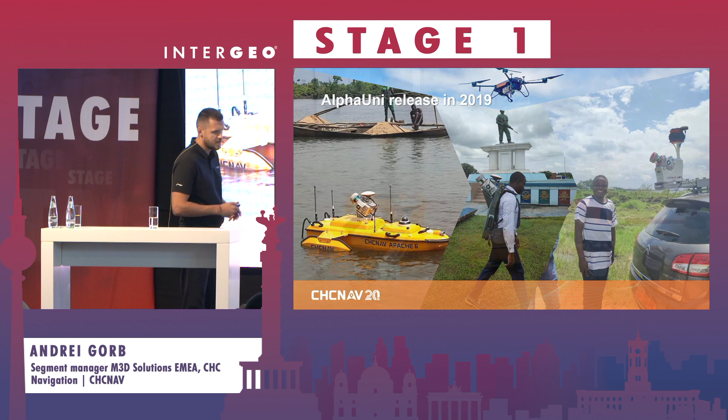And that year, the Alpha Uni series first came to the market. And you can see just one laser scanner can be attached on any vehicle, on various drones, on the backpack, and for small boats, like we have Apache, or on big vessels. So for multiple purposes. And then we continued the innovation, because we want to democratize mobile mapping technology. We make products smaller, easier to use, and more cost-effective. Then in 2021 came a new series of Alpha Uni, Alpha Air. And what is next?

As a leader in the geospatial industry, we always want to improve, we always want to be better, we want to always provide more accurate technology, longer range, more user-friendly data processing. To make this happen, first of all, we have a vision of our CEO. And he says, we are the leaders in GNSS, yes, but GNSS is not enough today to map everything on time. GNSS is a total station. LiDAR is the future. We agreed, and I hope you agree.

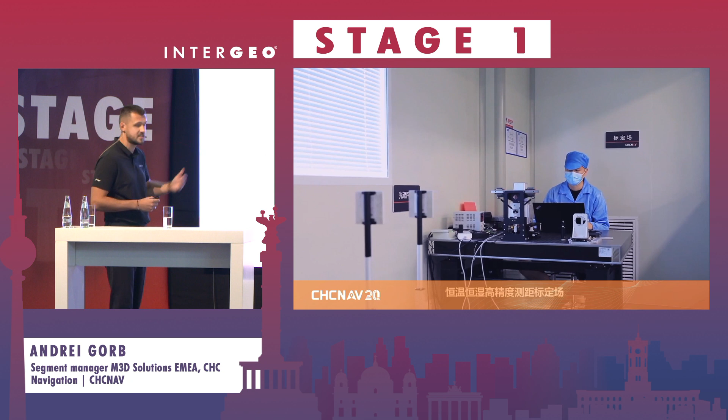And for this, first of all, to make democratization of technology, we built a fully new factory in Wuhan city. And you can see from inside how we develop our LiDARs. And we take very serious tests for accuracy, for angular measurement, stress tests, temperature calibration, because we need to be sure that LiDARs will work in the hot weather of the Middle East, of Dubai, Saudi Arabia, and they will work somewhere in the north, in Canada, in Ukraine, in Germany, or in Sweden.

So finally, after such big investment, after 4,000 tests in multiple environments, in hard environments, we're happy to introduce today at Intergeo, and you can see it on our booth, our latest generation of laser scanner, of LiDARs, fully based on CHC technology. Finally, we have Alpha Uni 20, or AU20 for short. You will see it on our booth, but in a very small form factor, in very small design, we combine long scanning range, high accuracy, very good vegetation penetration, which is needed for forestry mapping. And one of our main features is multi-platform installation. So let's see one by one.

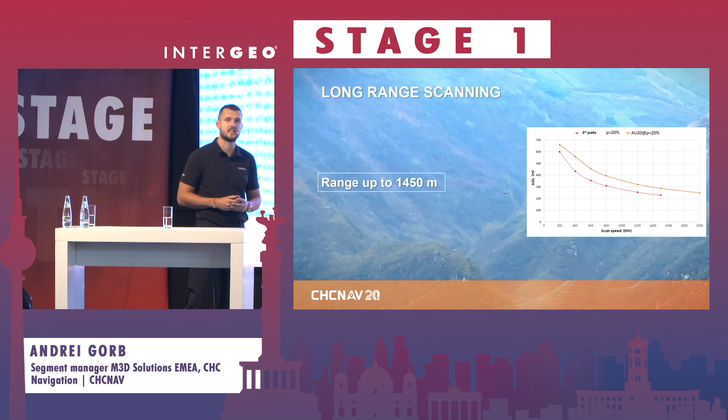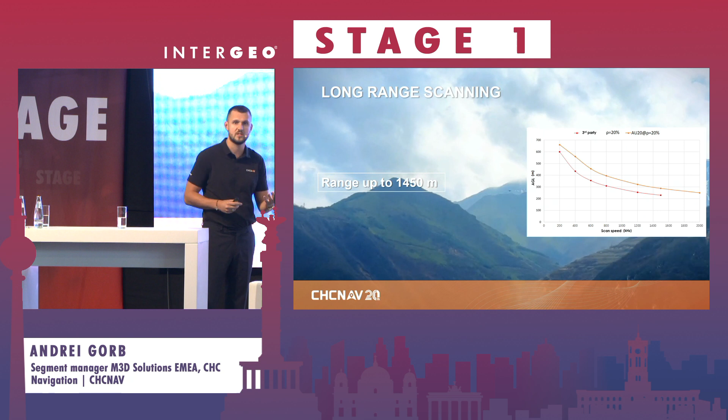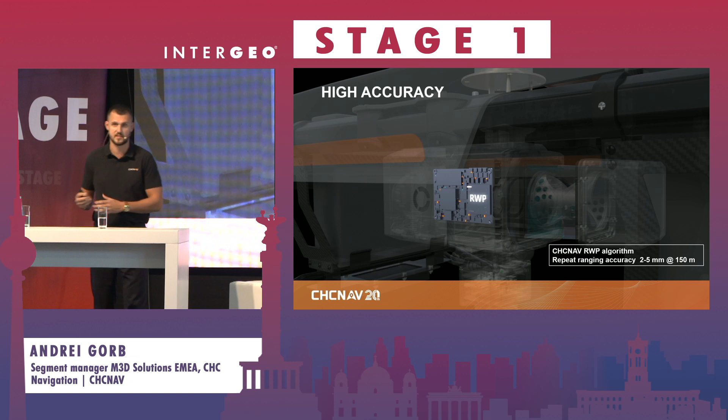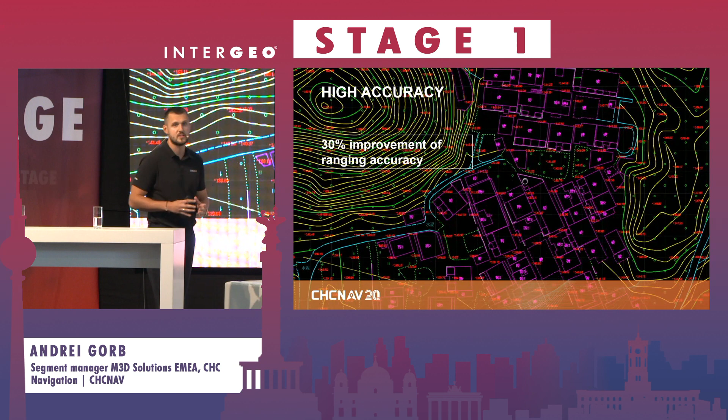For the long range, this device can scan up to 1.5 kilometers. So your drone can fly much higher, if it's allowed, can cover much bigger territory per mission, or you can use it more efficiently if you install it on a helicopter or a small plane. For the data accuracy, this device achieves 2 mm at 30 meters and 5 mm at 150 meters precision, for LiDAR accuracy itself. So we say absolute accuracy is the same as a total station or GNSS, so it's 1 or 2 centimeters. And compared to our previous generation, our accuracy improved by 30%, which is a very high achievement.

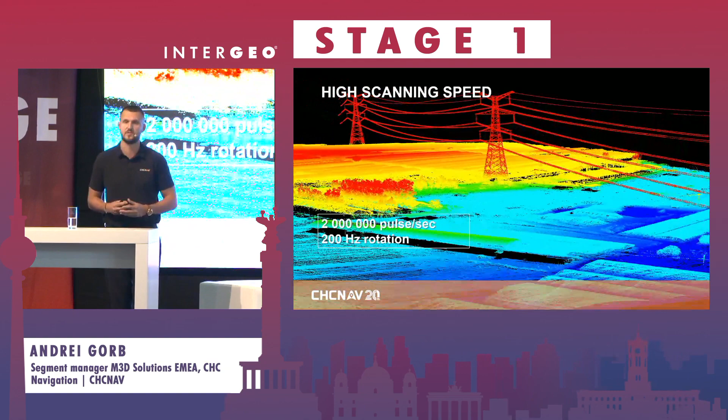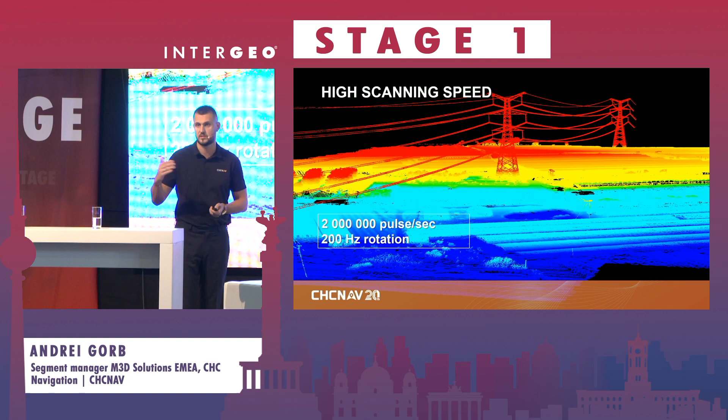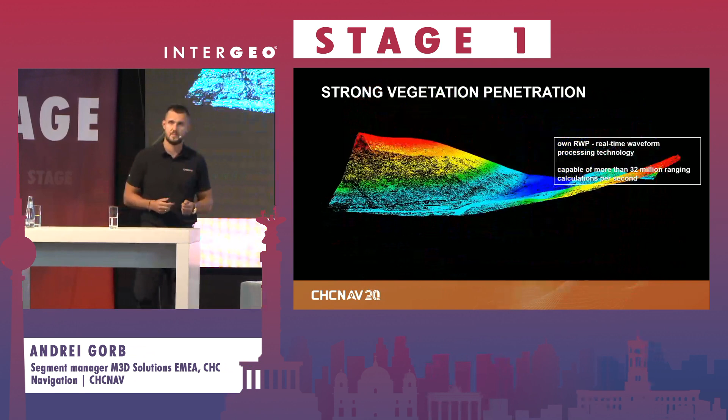For the speed, this new laser scanner generates 2 million points per second, one of the fastest machines today you can see in the market. And the rotation speed is 200 Hz. So 1,000 points per square meter you can achieve even flying on the drone at very high altitude, 120 meters. For users who are interested in forest applications to get the ground surface, this device makes 16 returns. 2 million points per second. It means 32 million ranging calculations per second.

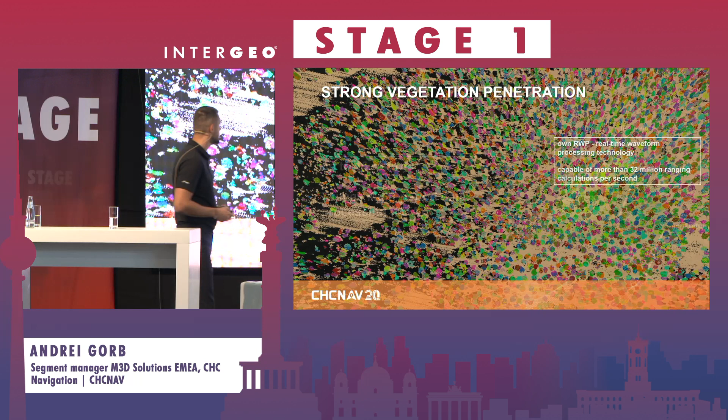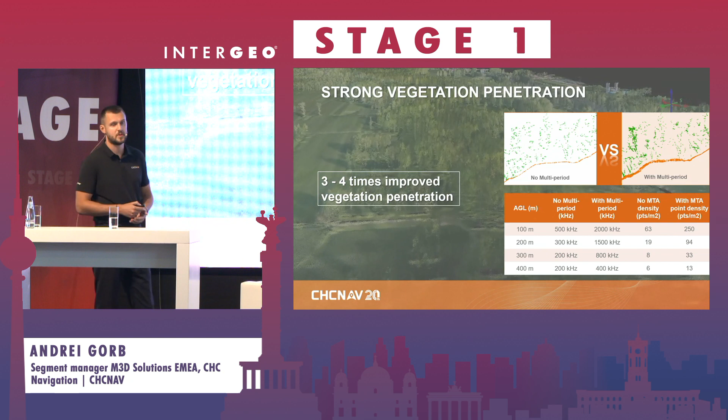And you can see on this video how good the vegetation penetration is, how good the terrain is, and you can even classify the trees for forest mapping. As you know, the more returns you have, the higher the probability to penetrate the trees and get your final terrain. Modern LiDARs usually have 3 to 5 returns, which is not enough for good quality terrain results, especially in a very dense forest. On this table, you can see how the technology worked previously on the left side of your screen. And on the right side, you can see that 3 to 4 times more dense point cloud we will get with the new technology over the trees.

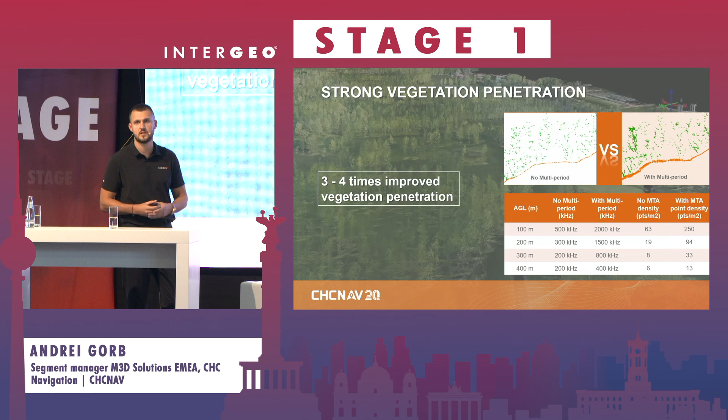And this is our main feature, why clients select CHC: multi-platform setup. You can see one device, Alpha Uni 20, you can use in various installations on many drones because it's quite lightweight, 2.8 kilograms. So it could be a CHC drone, or local UAVs very popular in Europe or in the US. We can also install it on various vehicles, car, train, move it to the backpack, and as you saw before, on the water for bathymetric survey on vessels or on the compact Apache series.

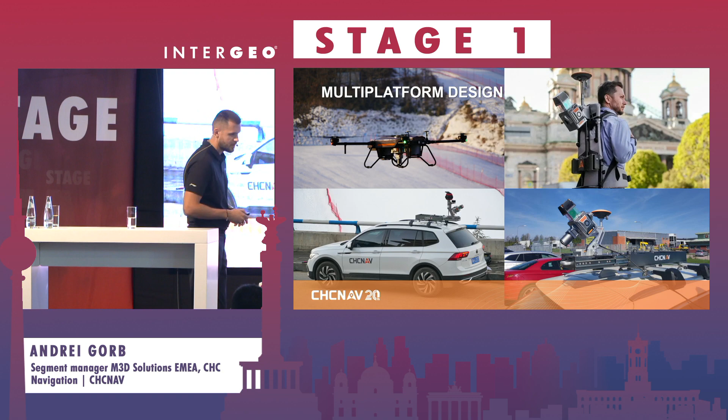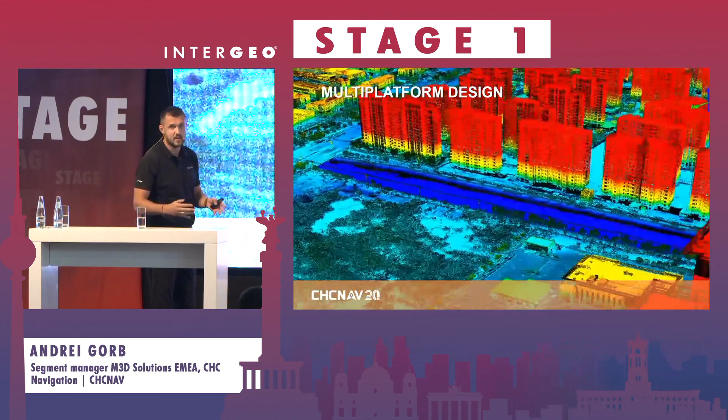The idea of multi-platform setups gives you the ability to combine the data in one view from the top perspective, from airborne survey, and from the ground survey. If you go to the mining industry, if you go for smart city mapping, for data capture in the city, then you have the ability to see everything from one survey with just one device in one processing of one

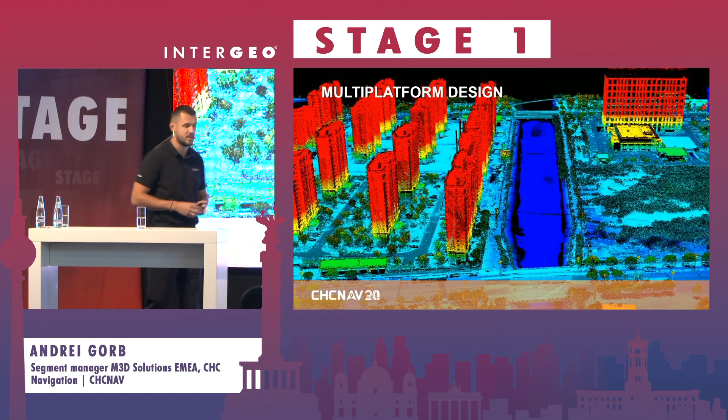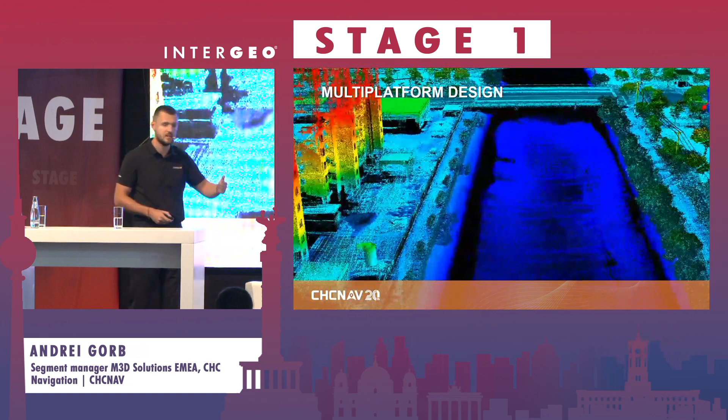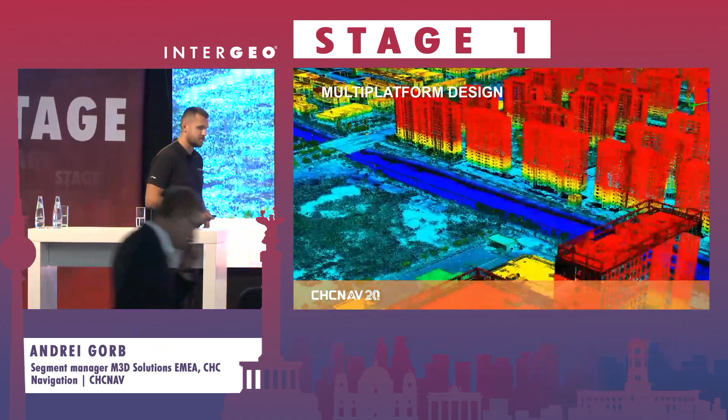software ecosystem. Like on this example, we see dense point cloud on the facades, on the road because of the car. We see even the point cloud on the water because of the multi-beam echo sounder which we use on our boat. And we see the rooftops because we use the drones here. So you don't need to use any other technology. You can just use one laser scanner in all environments.

With the release of AU20, you also can see on our booth our next generation of the car platform or backpack platform. We call it Alpha Pano. It contains quite a standard industrial camera, Ladybug 5 Plus, or you can optionally install Ladybug 6. And also in the middle, you will see this small scanner, which is needed for the SLAM.

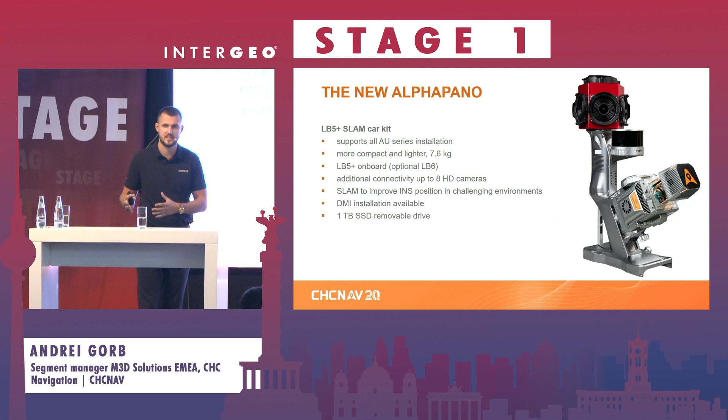So, you know, in hard environments for car mapping, in tunnels, in the city center, under the tree canopy, you have a lot of lack of GNSS signal. Your trajectory could be not calculated properly. The accuracy will be decreased. By using SLAM in this gap, you improve your final trajectory. So instead of using many GCPs or using the odometer, now this technology will make work more efficient.

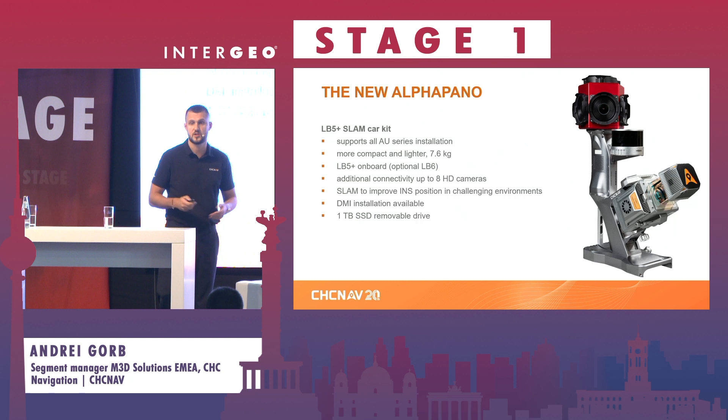And this platform is very flexible, so you can install our latest Alpha Uni 20, or you can move to our Riegl-based solution Alpha Uni 900, or to the lower cost or basic one, Alpha Uni 10. So it's a very flexible installation, very light. The total weight is 7.6 kilograms. Even a lady who is responsible for surveying can easily put it on the car.

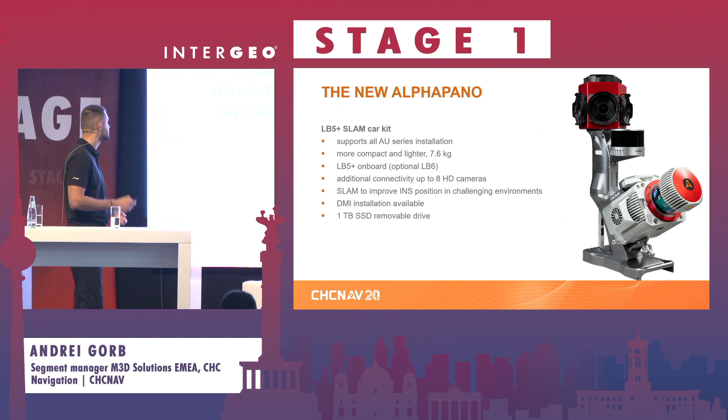And some examples of how we use this new generation from the car. It takes just several minutes to install, and then you can easily move without any cables, any special calibration to the backpack and walk, and SLAM will improve your position in hard environments. Then if you're a bit lazy and you don't like to walk, you can ride this buggy in places maybe where UAVs are prohibited to fly or a car cannot go. Like this is a very beautiful park in Saudi Arabia.

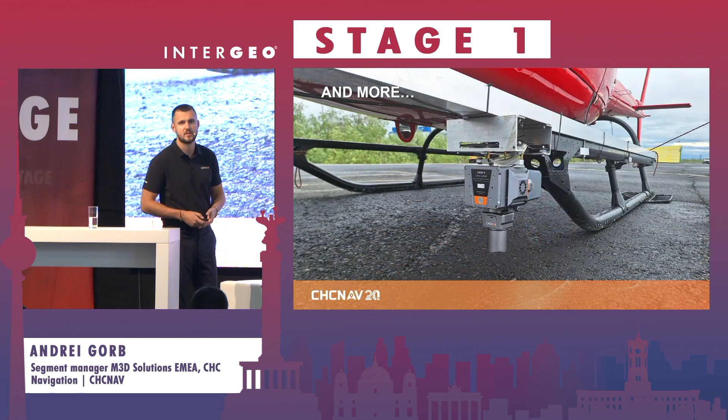You can install it on the drone and use it in a mining environment or in the city environment to get the airborne data. Then you can move to a helicopter because the range of 1.5 kilometers gives you the ability to do it. Or you can use it in water marine applications. This is an example from Bulgaria, where the Danube agency researched the sites of the Danube River.

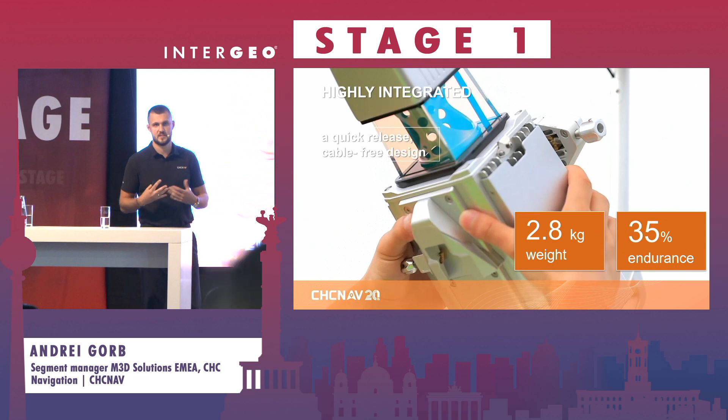Finally, if I talk about efficiency and integration, as I say, it's a very light and compact device. The total weight is just 2.8 kilograms, and it contains IMU, GNSS, all the components together. So if you use drones, the lighter the LiDAR is, the longer the drone can fly.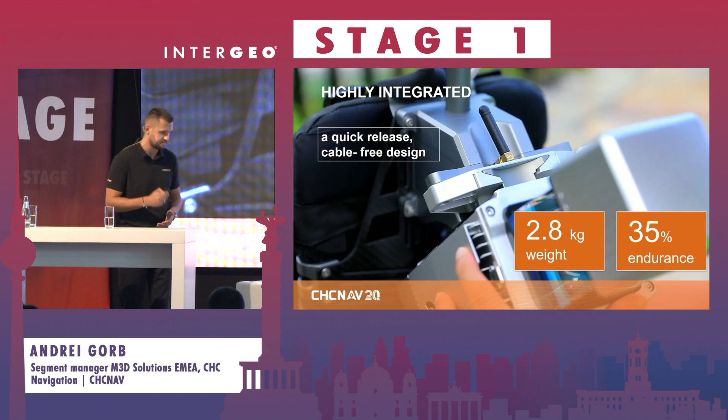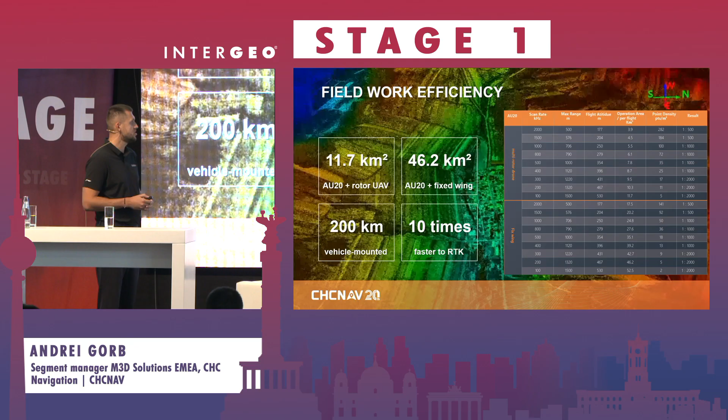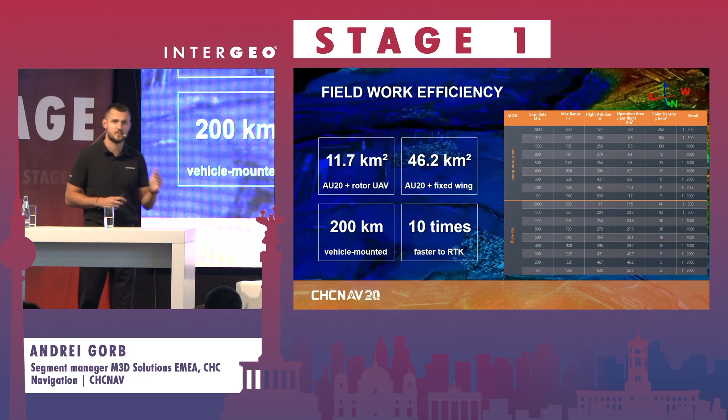And this is some example of the efficiency of the mapping. If you use rotor drones, like our BB4, depending on your altitude and the density you need, you are able to achieve between 10 and 11 square kilometers per mission. If you use VTOL drones or fixed-wing drones, which you can also see on our booth, you can achieve from 45 to 50 square kilometers with this LiDAR. So it's a very efficient mapping tool.

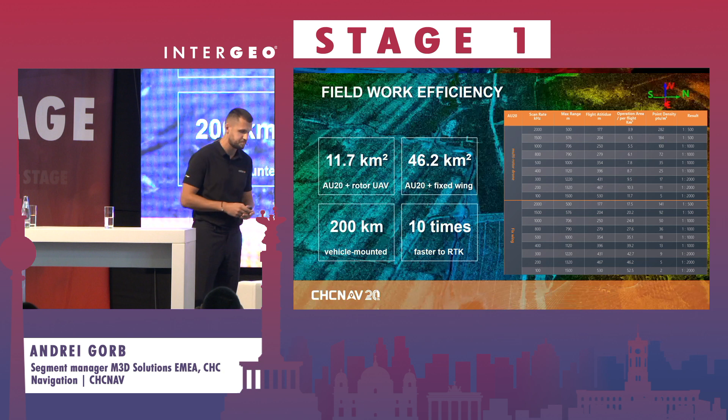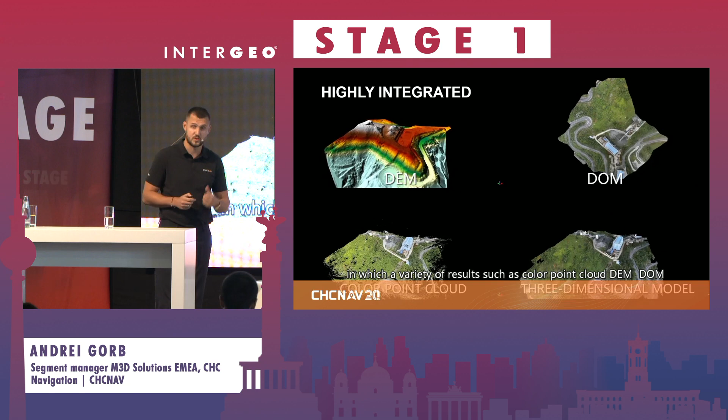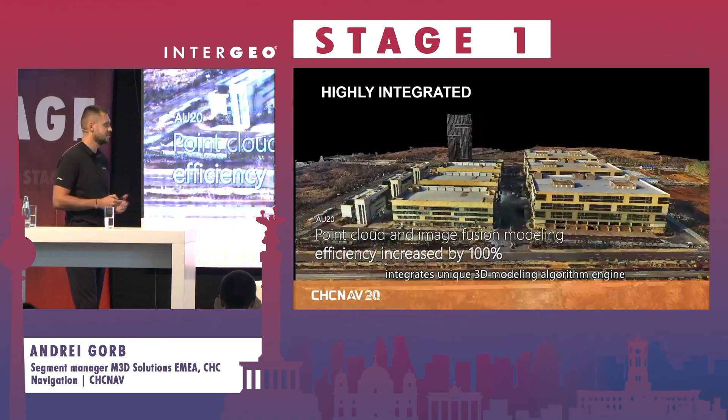Also, you can install several cameras. From ortho camera, you can move to oblique camera to generate not just a point cloud, which is fully colorized in real colors, but a digital ortho mosaic, a real 3D model. And everything you generate comes in one software package.

May I ask to click next? Excuse me. Can you click the next slide, please?

Thank you. So to make a summary, we try to achieve very good performance, the high-end technology in a cost-effective, compact way.

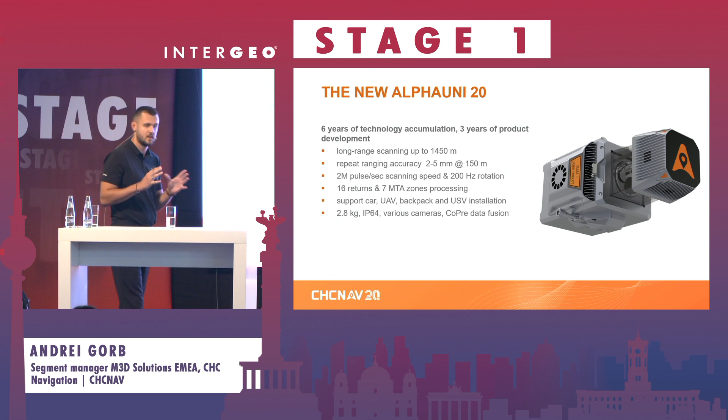And I just want to share with you another exciting news, a short video. I have some time, yes? With the release of AlphaUni 20, we also release the next generation of compact airborne LiDARs, which you will also see on our booth, because we see that modern geospatial engineers face many issues with photogrammetry or with low-cost LiDAR technology. So to avoid this, the new Alpha Air 10 came to the market. And here is a short video.

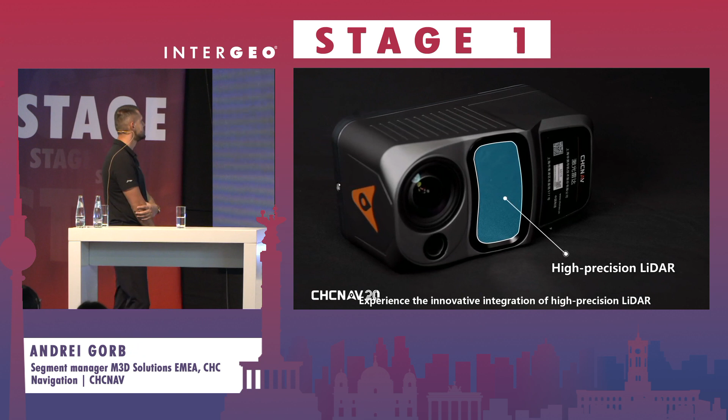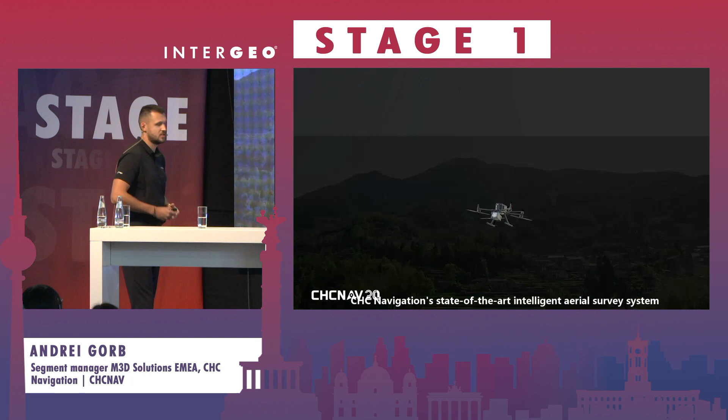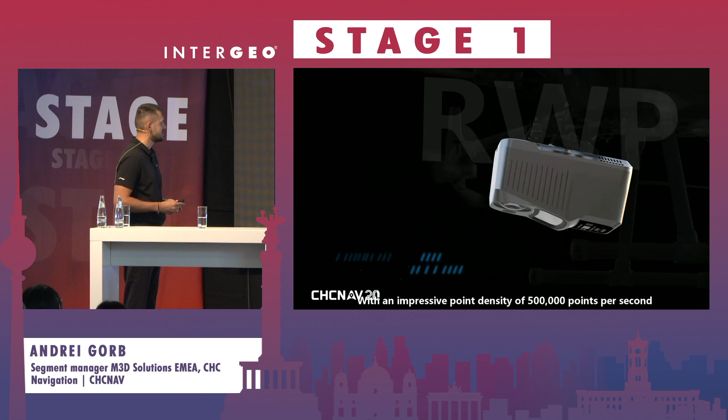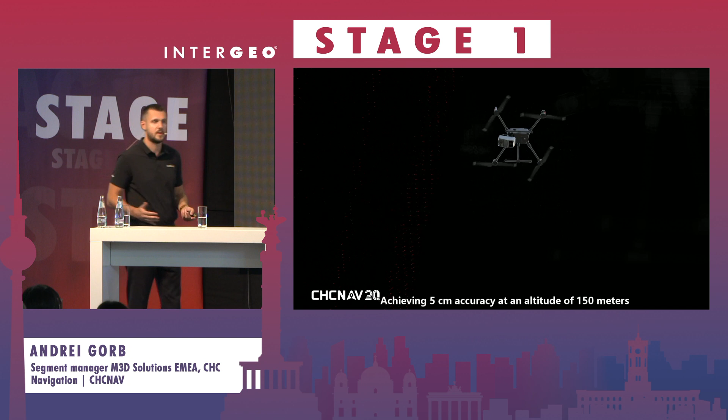What is important, you can see installation on a very famous drone, DJI Matrice 300, 350, so all DJI users can easily connect it to their current UAV to use this accurate technology. 500,000 points per second, 5cm accuracy at 150 meters. The range is 800 meters. Yeah, it's too much for Europe, but in many countries you can fly much higher. And your mapping corridor will be bigger and more efficient.

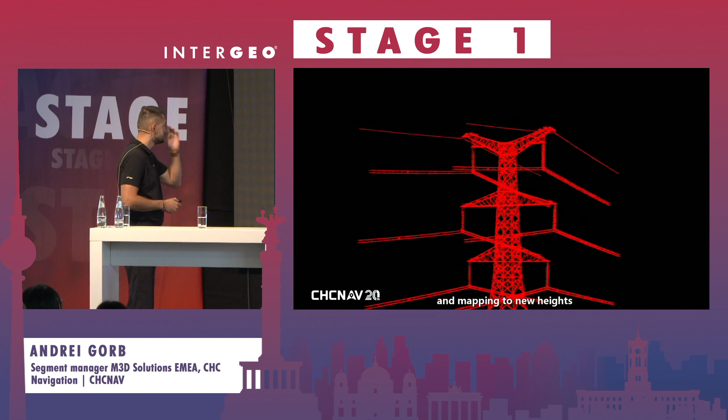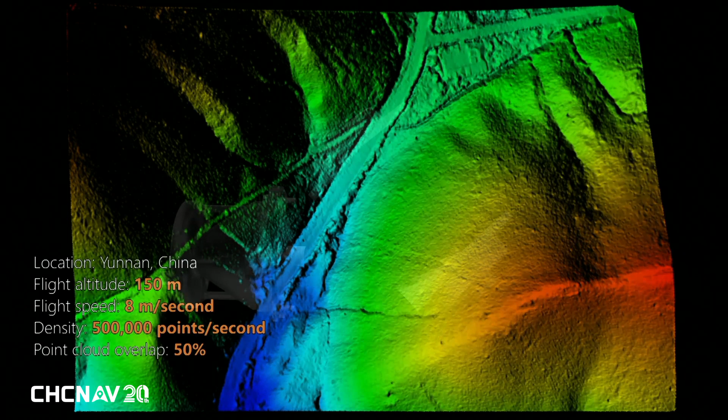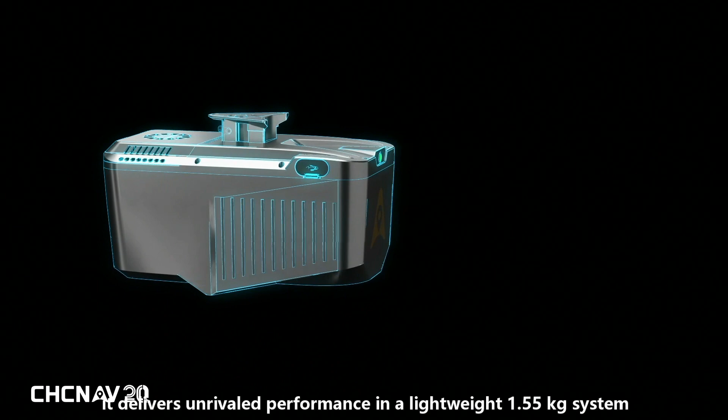If we speak about forestry mapping again, this device can achieve up to 8 returns. So again, the vegetation penetration will be much simpler and easier compared to the previous generation. It's our new, fully patented CHC tilted prism technology, combined with a high precision IMU, combined with a full frame 45 megapixel camera in a very compact design. So the total weight of the unit is 1.5 kilograms. It means with the Matrice you can fly approximately half an hour.

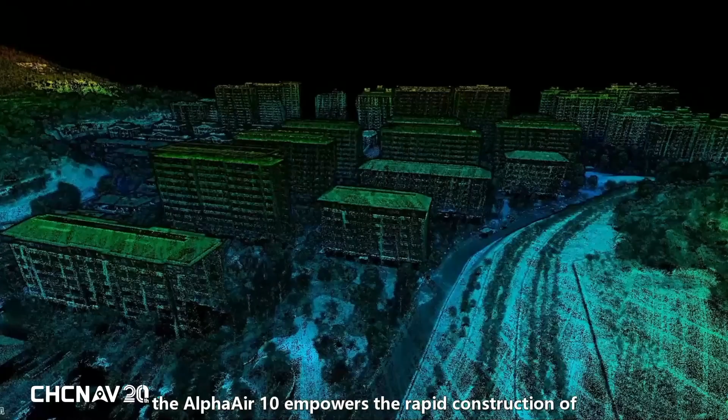And as I say, we're not just a hardware provider. We provide for you an entire ecosystem. Hardware always goes together with the field and the office software. In just one software, you can process all results, generate a point cloud, 3D models, orthophotos, and digital terrain.